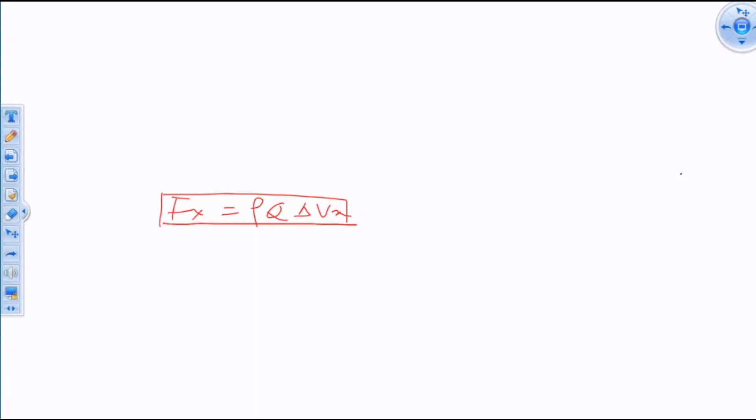Now, for example, so you have a fixed plate, and this is impinged by a jet of, let's say, 75 millimeter diameter. The jet dia is 75 millimeter, impinging on this flat plate, and the jet velocity is 25 meters per second.

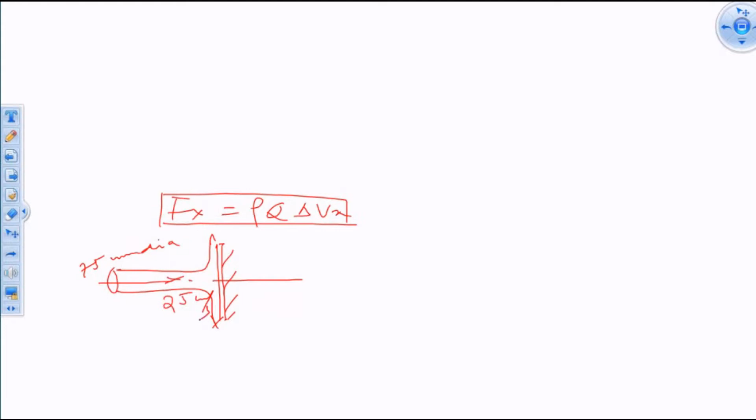Find the force for equilibrium.

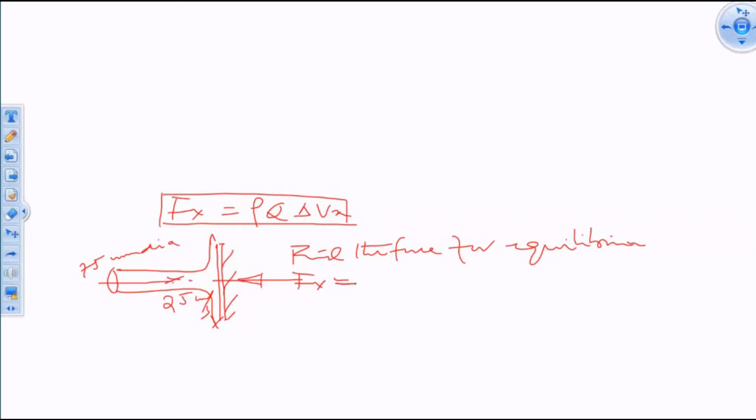So to find the force, if this is fixed, the force for equilibrium is Fx, and Fx equals the equation rho Q delta Vx.

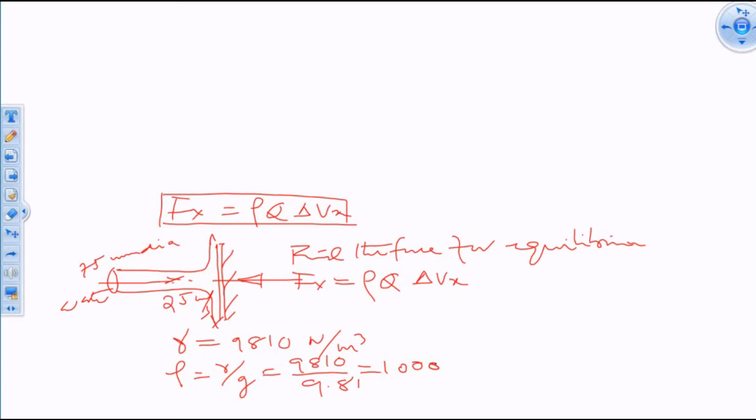Now, this is water, so the jet is of water. For water, gamma is 9810 newton per meter cube, so rho is gamma by g. This should be 9810, g is 9.81 meter per second square. So rho is 1000. Right? This is 1000.

Q is area of the jet times velocity of the jet, delta Vx. The final velocity is delta Vx2 minus delta Vx1. Delta Vx1, this is 25 meter per second. Vx2, this is 0.

So this should be equal to 1000 multiplied by area of the jet, pi d square by 4, d is 0.075 meter, so pi d square by 4, that is area, into velocity 25 multiplied by 25. So we do all this and we find this equal to 2760 newton.

It's a very... minus 25, oh minus that, yes minus. This means the force is acting - we say if it is in this direction this is plus, if it is in this direction this is minus. Minus means the force is acting from right to left for equilibrium. This means the problem is quite straightforward. Is it okay? Yes sir. Let me erase this.

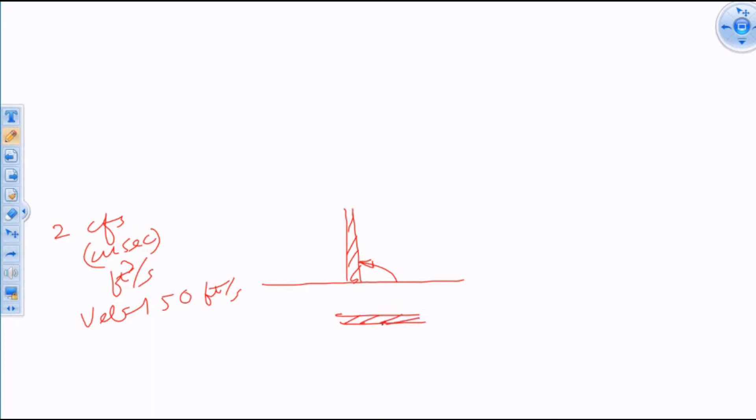এই যে মনে করো একটা প্লেট, এটা হচ্ছে ভার্টিক্যাল প্লেট, প্লেট ঠিক দিস ভার্টিক্যাল, এখান থেকে যদি XY কোঅর্ডিনেট নাও, এটা হলো 90 ডিগ্রি। প্লেটটা তো হরাইজন্টালও থাকতে পারে, the plate is at 0 degree. When it is like this, the plate is at 90 degree. যখন প্লেট এরকম থাকে,

then we say the plate is at theta, where theta is less than 90 degree. যদি বলা হয় the plate is deflected by 90 degree like this, the plate is deflected by theta where theta is at 60 degree, is like this.

যদি বলে the plate is deflected by 135, তার মানে এখান থেকে এই যে 90, 135, so the plate is deflected like this. This angle is 135 degree. এটা প্লেটের বেলাতেও হতে পারে, পাইপের বেলাতেও হতে পারে। Say a bent pipe is bent say 90 degree.

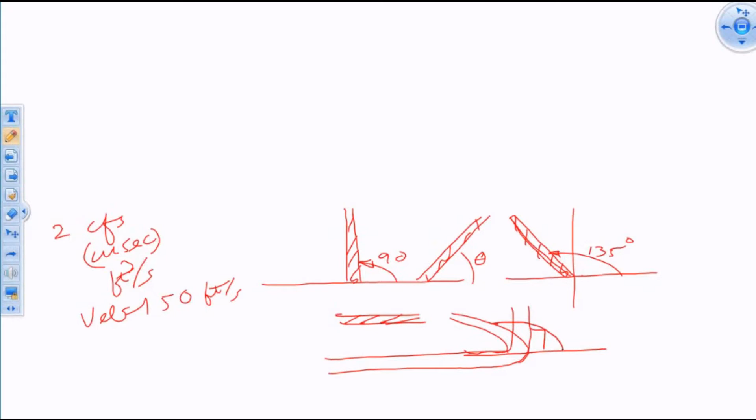The pipe is bent by say 110 degree. That means the pipe is like this. This is okay, it is also 90 degree, and this angle is say 110 degree. If the pipe is bent say 5 degree or say 15 degree, this would be like this.

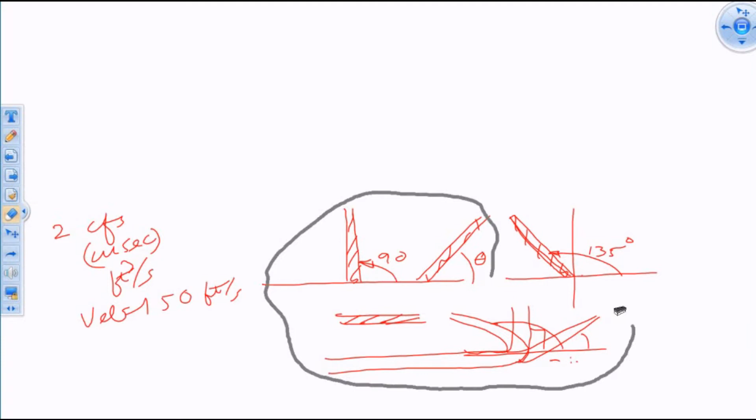So in this case, the plate is deflected by 135 degree, and the jet with 150 velocity, jet is changing like this. Okay, so the jet is moving out like this. Okay, you'll have to find out the force.

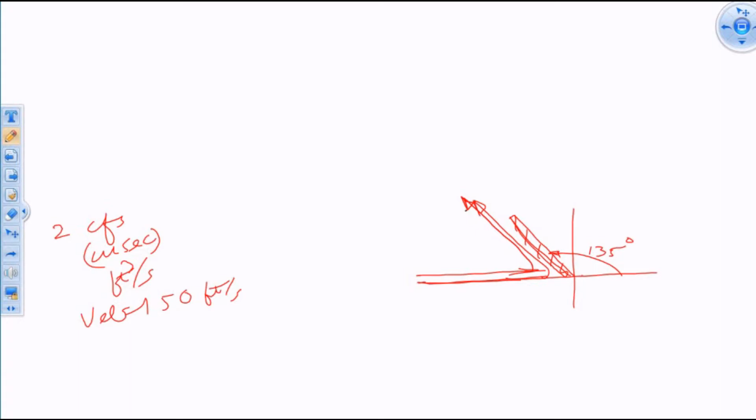Find the force exerted, so let us find out Fx. Force in the x direction should be equal to same equation rho Q delta Vx. It should be say this velocity - this is entering with velocity v, going up velocity v,

and this will have two, say, components - this is Vx and this is Vy. Write it Vy, this is Vx. So this is in fact this way. This is Vx1, this is Vx2.

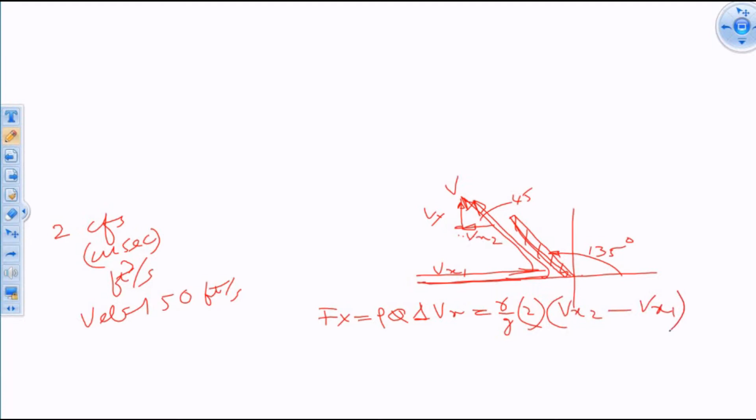So rho কি, gamma by g, q - এই q দেওয়া আছে কত, 2 CFS. Okay. Delta Vx মানে কি - Vx2 minus Vx1. So what is the gamma হচ্ছে কত আমরা বলছিলাম - 62.4 pound per feet cube, আর g হচ্ছে FPS এ 32.2 feet per second square, multiplied by 2.

Vx2 হচ্ছে তোমার এই যে V, this V cos of 45, cos 45 ঠিক আছে, and minus Vx, এই যে 150 - this V is also 150. So 150 cos of 45,

and that is Vx2 minus Vx1. It is the follow. This will give you the result of 990.

Similarly, to me, Fy is equal to, should be equal to rho q delta Vy. And in this case, so you have the Vy1 should be equal to 0 because there is no V1, but Vy2

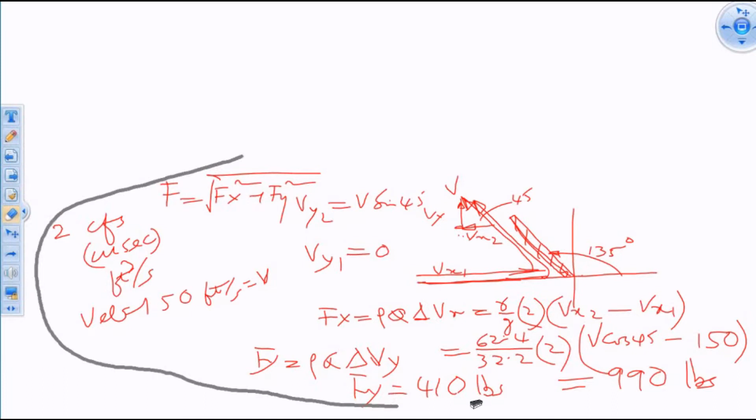স্যার টোটাল রেজাল্টেন্টের ভ্যালু কত ছিল? রেজাল্ট আরে মিয়া একটা রেজাল্টের জন্য এটা করে নিতে পারো না? হ্যাঁ, এই গুণাঙ্কটাও করতে পারবে না জি স্যার। ওকে, এবার আরেকটা অঙ্ক।

এটা মনে করো, দেখো। 20 CFS of water flows through 18-inch diameter pipe having 90-degree bend. The pressure at the entrance of the bend is 10 psi.

Find the force components normal and parallel to the approach velocity to hold the bend in place.

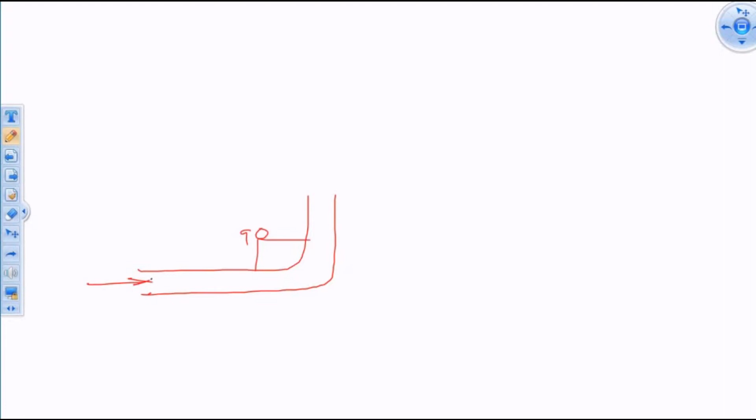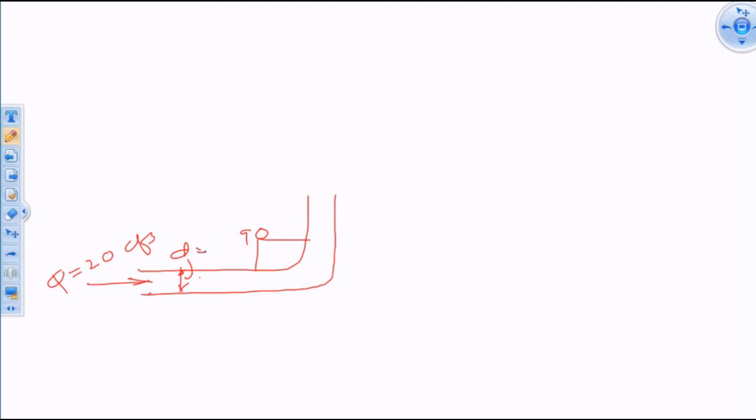Okay, and also say the 20 CFS. The amount of water entering is 20 CFS, and the pipe diameter - if this is D, diameter of the pipe is 18 inches.

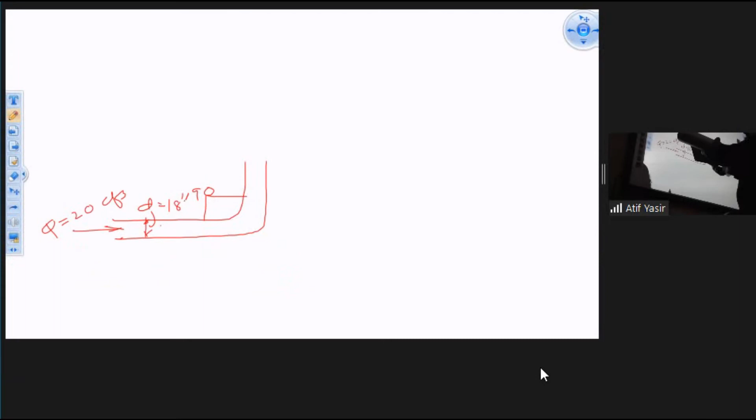The pressure at the entrance of the bend - the water is entering so much water, but the pressure here is 10 PSI. And water is flowing off, so it is going like this.

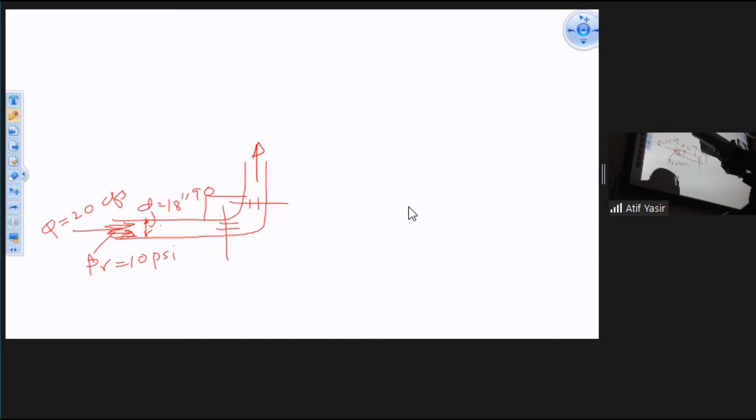So you will have to find out the components of normal and parallel force to the approach of the velocity. The velocity of water is entering.

স্যার Yes. স্যার টু হোল্ড দ্য বেন্ড এরপরে কি ছিল স্যার কোশ্চেনে?

In place. আমি আবার বলছি 20 CFS of water flows through 18-inch diameter pipe having 90-degree bend. The pressure at the entrance of the bend is 10 psi. Find the force components normal and parallel to the approach velocity to hold the bend in place - জায়গা মতো ধরে রাখা। এবার বুঝছো নাকি বুঝো নাই?

জি স্যার বুঝতে পারছি। So when this is entering there, a force Fx will be, the force Fy is getting this side। বলতে তাহলে না তাহলে তো পানি ঢুকবে আর পাইপটা ছেড়ে বার হয়ে করে দেবে, তাই তো? ওকে।

Now what is the velocity of water? It's a uniform diameter pipe, so velocity should be Q divided by A. Now Q is given, A is given, diameter is there, so you can find out the velocity of water. I think the velocity would be something like maybe

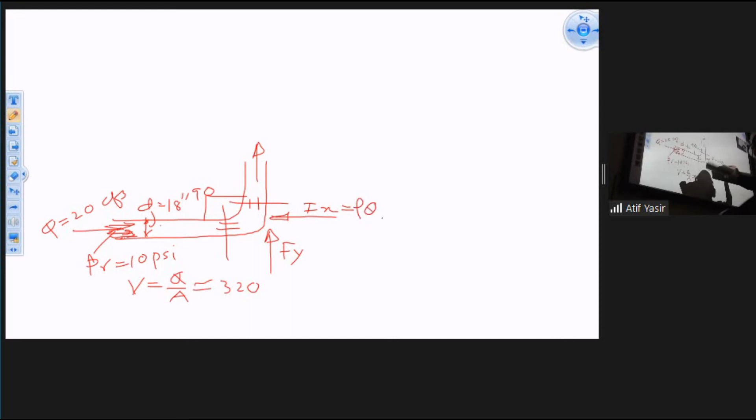Okay, now so the Fx should be equal to rho Q delta Vx, so our rho is there, and if rho pata hobe, gamma rho of water, gamma by g, that is 62.4 divided by 32.2. You put it there, Q is 20, rho Q delta Vx.

What is delta Vx? So rho Q, the pipe is kept fixed, so the velocity should be first Vx1. This is Vx1 entering through this, you can put it, and this should be equal to

435. So go down to parallel force.

So parallel force should be equal to here। স্যার এখানে মাইনাস হবে না এফএক্সটা, মানে সাইনটা আর কি? এফএক্সটা দেখো, ম্যাগনিটিউডটা দেখো, মাইনাস দিও, অসুবিধা নাই। Just find it out this way.

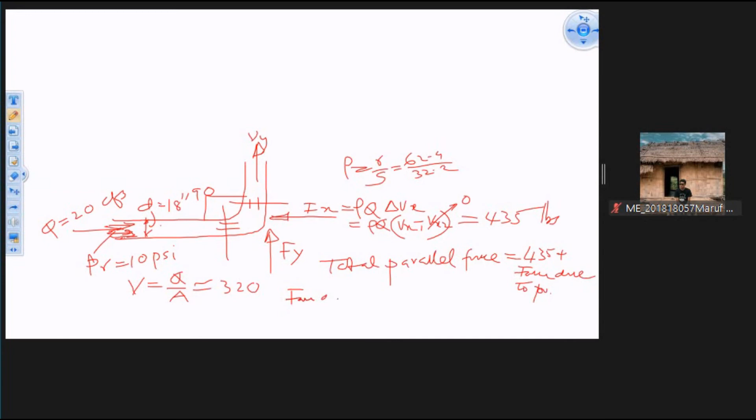force due to pressure. The force due to pressure কত সেটা বের করো। Force due to pressure should be equal to এই যে 10 psi pressure into area. Area of the pipe কত, pi d square, এই যে diameter is 18, pi 18 square by 4.

It is correct, you can find it out, and this would be 2540. So the total parallel force would be this plus the data, this plus the 2540, 2540.

That means this would be 2,975. So the force parallel to the approach, FF is 2,975 pound.

Similarly, you find out Fy normal to the approach, and the Fy should be also rho Q delta V. Rho Q here again, rho Q delta, sorry, Vy2 minus Vy1.

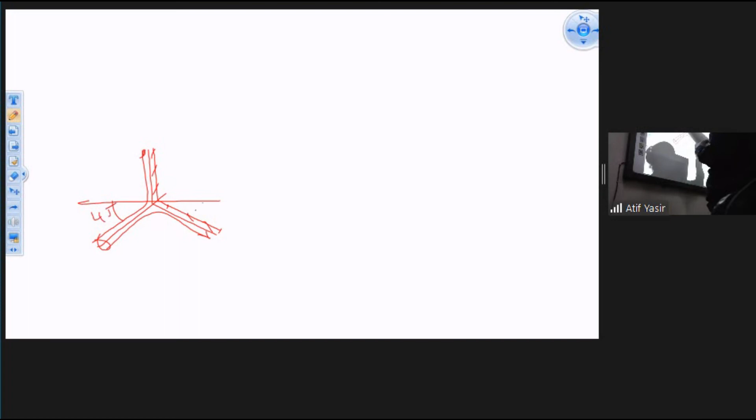A jet is impinging on a bent plate like this, a fixed plate. This is 45 degrees. This is 60 degrees. And so a jet with velocity 15 meter per second is impinging like this.

And the amount of water Q is equal to 0.03 meter cube per second in each direction. That means Q in this, Q in this, the same Q. But the velocity is 15.

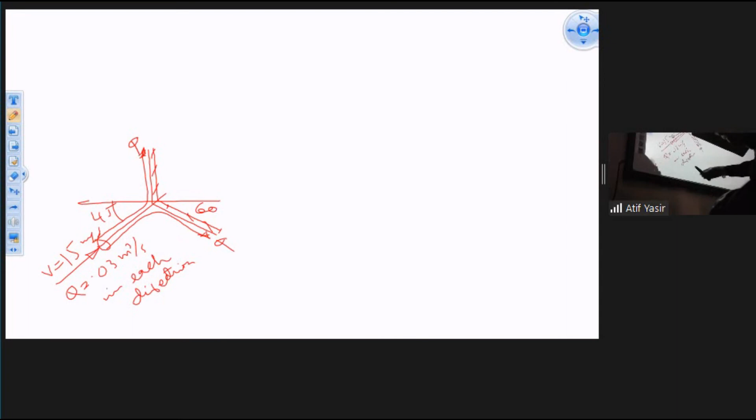The jet is moving like this with velocity 15 meter per second. But the amount of fluid going in this direction is Q, the amount in this direction is also Q. And Q is 0.03 meter cube per second. The amount of water is given, velocity is given.

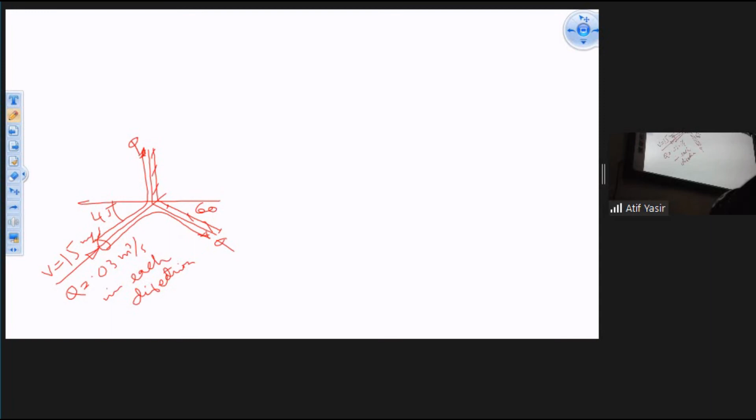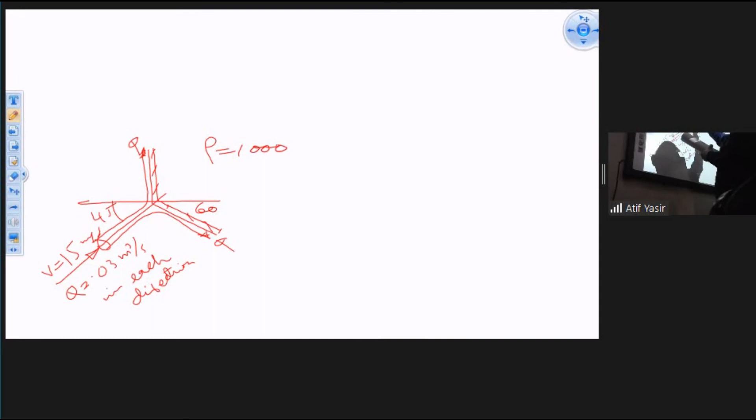That is rho Q delta Vx. Rho of water is 1000, because rho is equal to gamma by g. Gamma is 9810 Newton per meter cube. g is 9.81 meter per second square. So the rho is this.

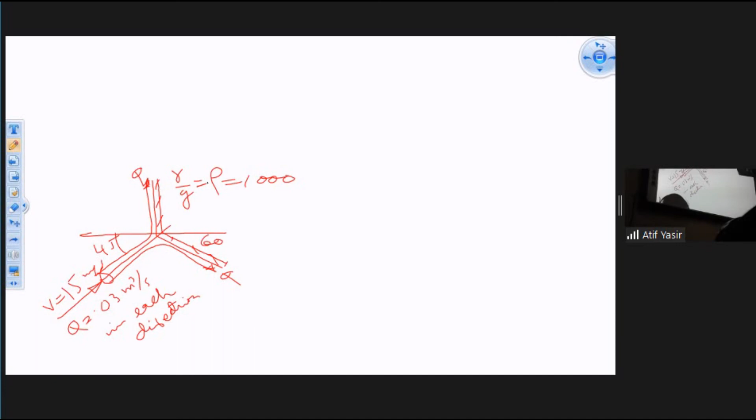Fx, the total force acting in this direction. Fx should be equal to Fx plus Fx. Anyway, Fx should be equal to 411. Similarly, Fy should be minus something, 576.8.

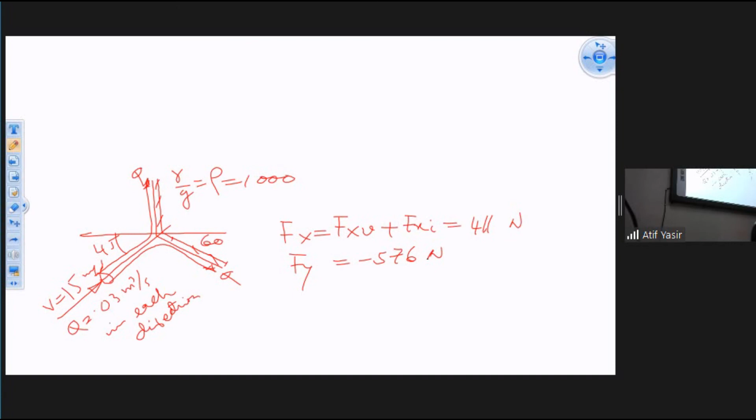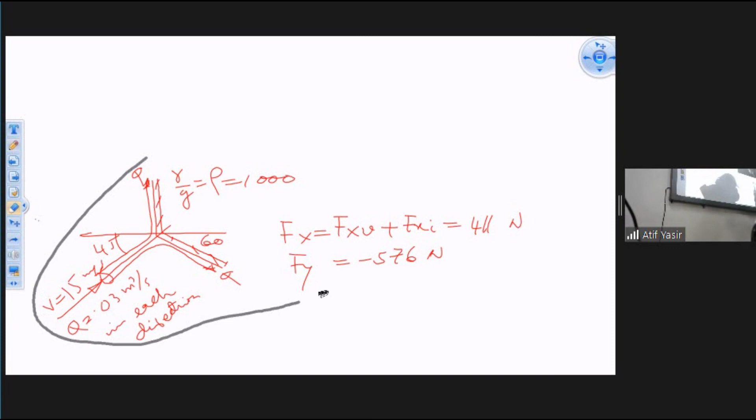Okay. Now, so far we have discussed this fixed plate business. এখন আমরা দেখি forces on moving plates or moving vanes, অথবা moving blade. Moving plates are normally straight; with a vane, মানে something curved, so you can say moving curved vanes, curved blade. Vane and blade যখন বলে, normally that is curved.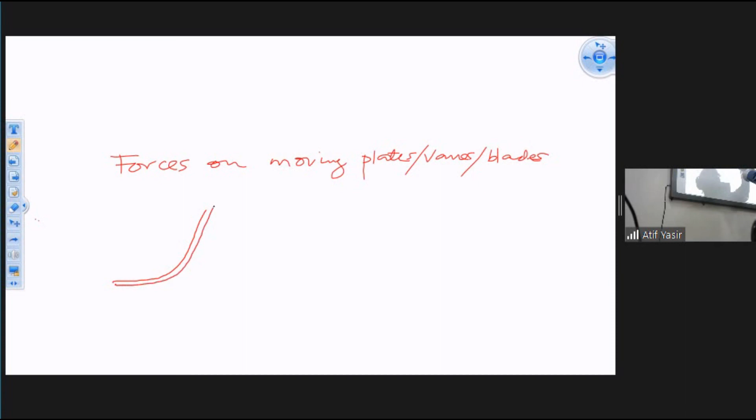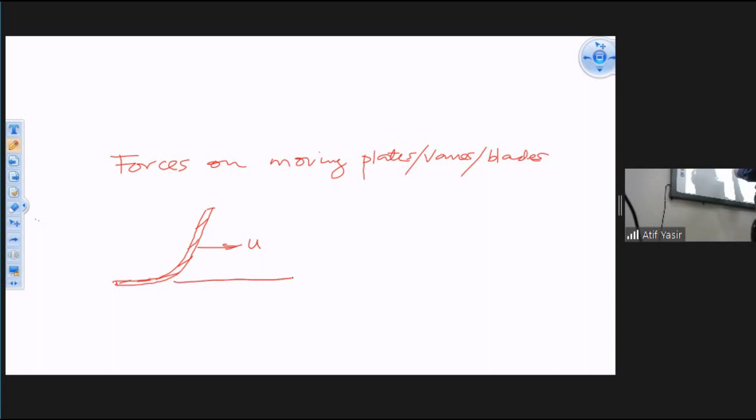It's very simple. So we have a curved vane, like this. This is a curve but moving, so the blade itself is having a velocity u, and this is inclined at an angle θ. And this moving vane is impinged on by a jet of fluid of area a with velocity v.

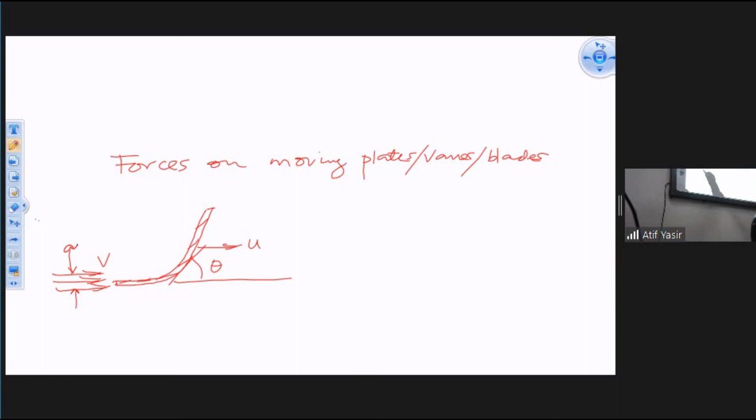You'll have to find out the forces; it's a single vane. স্যার ডায়ামিটার কি a ধরেছেন? a is the area of the jet. Diameter দেওয়া থাকলে area বের করতে পারো, area দেওয়া থাকলে area, no problem. Then what is the amount of fluid going? It should be equal to area of the jet multiplied by velocity of the jet. But when the jet is hitting, the blade itself is moving with velocity u.

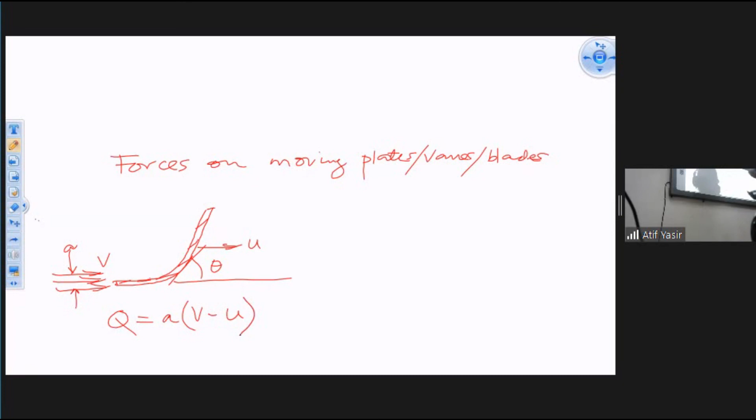Here, it is moving with velocity u. The blade is moving, so the relative velocity is v minus u. We call this the relative velocity, or the striking velocity. So Q is area into velocity: velocity of the jet minus the velocity of the blade. Similarly, you can find out delta Vx, which is Vx2 minus Vx1.

Now, what is Vx2? This is going out like this, smooth plate, with velocity v minus u. It will have 2 components, a horizontal component and a vertical component. The horizontal one is Vx2 and the vertical one is Vy2.

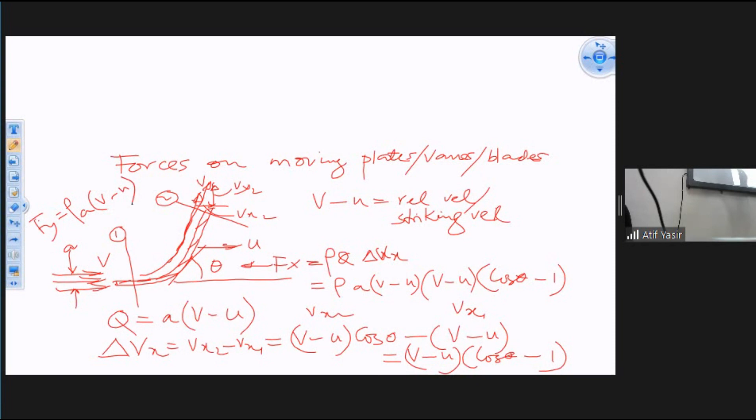That means rho A (V minus U) square (cos theta minus 1). That is your Fx. Similarly Fy should be rho A (V minus U) sine theta. Sir, V minus U square হবে না? Yes, square: rho A (V minus u) square sin theta. That is Fy and this is Fx.

So this is the equation for a moving blade, or moving vane, along with the fixed plate, fixed blade. Now we have done the formula for the moving blade. The process is the same; the application of the linear momentum equation is the same.